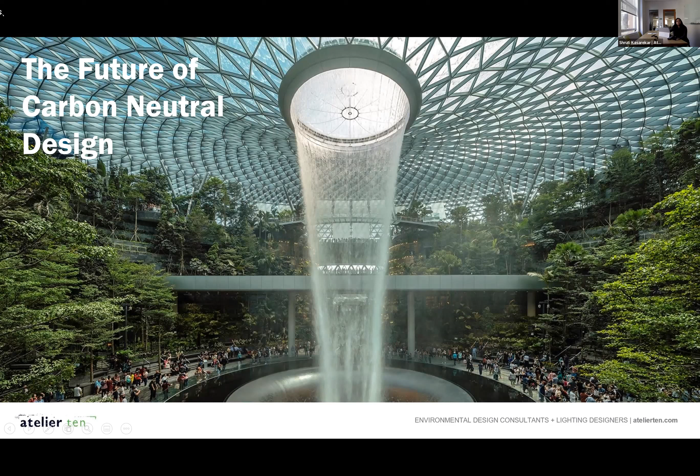Okay, there you go. So a little bit about Atelier Ten. We are a group of environmental designers, that's what we call ourselves, who are focused on delivering sustainability, and the definition of sustainability changes for us for every project. We are a group of people who have various backgrounds, from architecture to urban ecology to material toxicity, mechanical engineering, electrical engineering, lighting design, master planning. So all different angles here come together, and I think we share this passion about making a difference in the built environment at any and every scale, and that's what we are.

Our basic principle around our practice is to have buildings do more, to have the landscape, anything that we build, do more and find meaning into it. We go back to the first principles very regularly. I think that's who we are. So we go back to the basics, try to look at the physics and the science behind it, and try to provide solutions and strategies around that.

We love to work with architects, and a lot of us are architects by training, so we naturally speak that language, and we absolutely value design and love to work in an integrated design process, coming up with solutions that are not just created by us, but design solutions created by an integrated team. One of the things that we have developed over years is that we remain very pragmatic. We are very practical, we understand what it takes to deliver architecture, and we think solutions should be pragmatic for them to become real and for us to learn from them and to move forward. So our practice is very pragmatic.

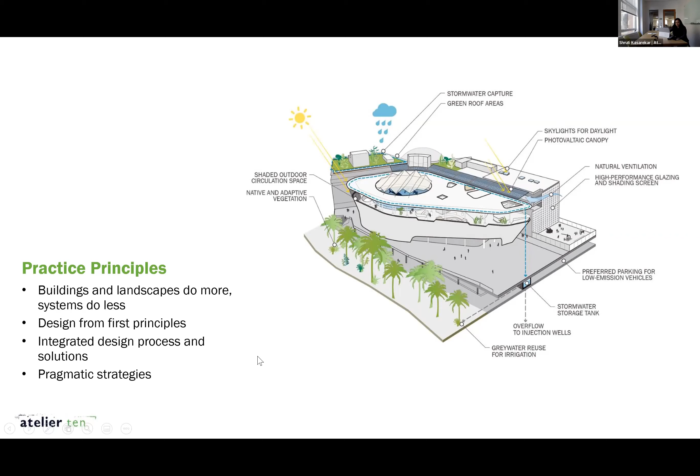Our services have been developed because we find very often on projects that the needs are different, the client is different, and the solution is different. So it isn't one answer for all projects. It is a tailored, unique, custom answer for different projects.

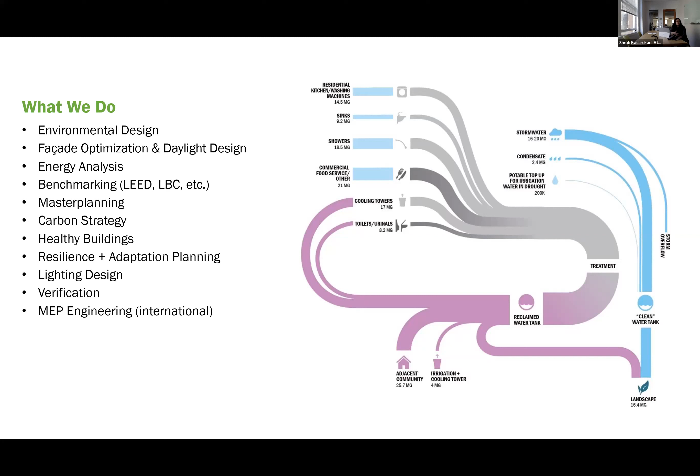So we use, whether it is environmental design or facade optimization, or energy analysis, benchmarking, it depends on what the project needs and criteria is, and we'll bring that expertise and that menu to the table to deliver sustainability. We remain a pretty small firm.

We are around 100 people in the United States, and we have more than 11 offices all around the world. Because we are still quite small in size, we work across all the offices quite regularly. What that lets us do is we have experience in different climate zones for different typologies in different cultures, and we regularly share resources and projects across our offices.

I wanted to give you this context to tell you where we are coming from and why we care about this. What you're going to see through this presentation is that our viewpoint has been developed by working on similar topics and similar questions for years and years, trying to answer the next thing on the next project. So you're going to see that approach through multiple case studies where we've tackled a few issues, and then the next project allows us to push that even further. So we continue that journey.

So why do we care about carbon? Setting the stage here for carbon emissions. Most of you are, I'm pretty sure, very well aware of the recent news on climate change. And honestly, for us as a practice, 2018 was quite a defining moment for us. Until then, we were talking about climate change, talking about carbon emissions as a thing that we all should be doing on our projects, and that's the lens we should have to look at our buildings.

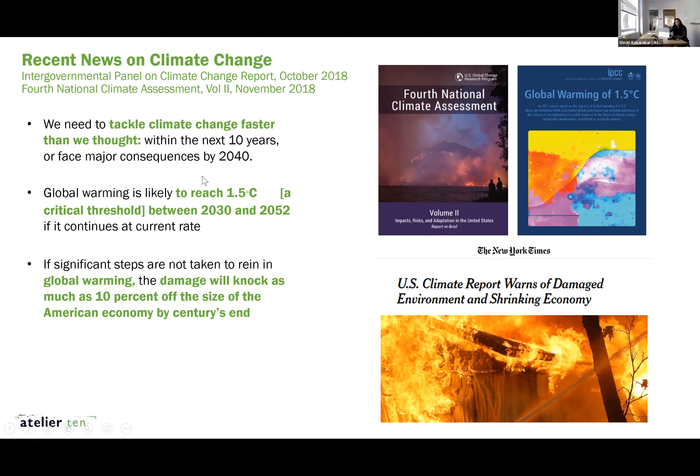With that, we also see that local jurisdictions, codes and standards have also started to evolve based on this information. So in September of 2018, California SB 100 went live. Essentially what it said was that all electricity in California was to be carbon-free by 2045, and majoritarily carbon-free by 2030. Again, this is within the next few years, and this is a huge opportunity for buildings.

And this is not just in California. We see this change all around the world, definitely in all jurisdictions in the United States. Places like New York City are going even a step further by saying that they want to have 100% renewable electricity by 2040, which is even sooner than California.

The other place where we see the codes going is embodied carbon emissions, which is very close to heart and also where architects can do a lot of change. California AB 262 requires that state agencies consider embodied carbon emissions for materials like steel and glass when contracting for state-funded infrastructure projects. It's only a matter of time that this language gets translated into local codes like Cal Green, or even the prerequisites for LEED, which eventually become the code for local jurisdictions.

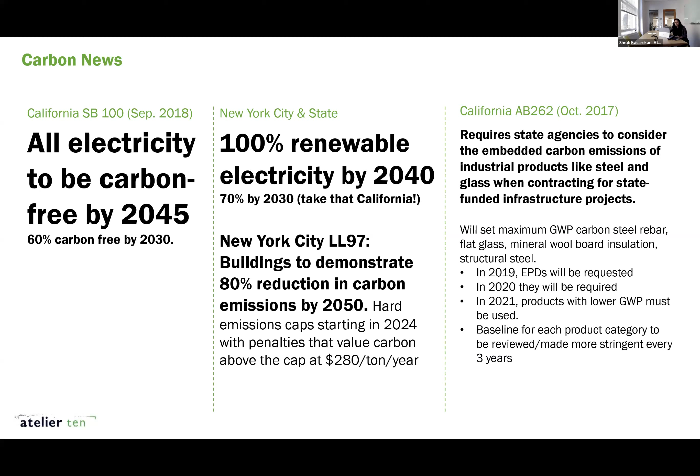So when we think about decarbonization within the context of the built environment, there is so much that we as designers can tackle. We've always talked about energy conservation for the past many years. I think the new information coming to light as a result of some mandates from local utilities and states is that electricity is getting cleaner, which means our energy sources are getting cleaner. We need to take a new look at how to design buildings to take advantage of that.

In addition to that, embodied carbon of materials, as I mentioned, remains a significant topic for designers to influence. There are so many areas and avenues through which designers can influence the carbon emissions of projects. The built industry isn't formally recognizing some of these. That doesn't mean we shouldn't be aware of them and tackling them, but topics like refrigerants, waste created through buildings, water, and transportation are key criteria that will influence the overall carbon emissions of any project.

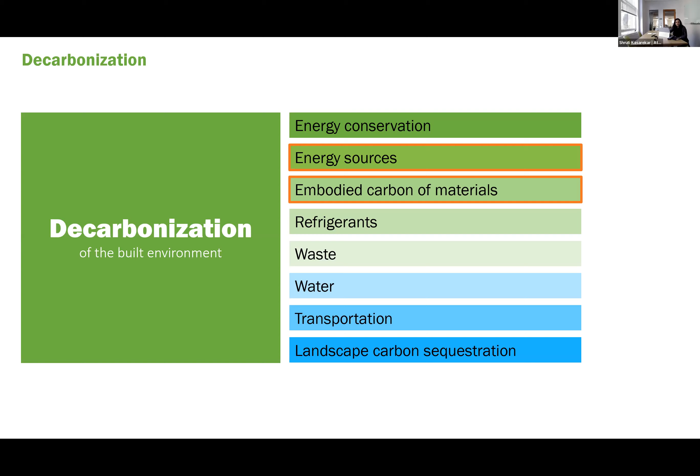In this presentation, I'm going to talk about energy sources and the embodied carbon of materials as two topics to dive into, to tangibly understand what we can do right now to lower the carbon emissions associated with these. My presentation has two sections where I introduce these two topics — embodied carbon emissions and operational carbon emissions — and then a few case studies to illustrate how through design we can achieve these goals.

So I'll go through the embodied carbon emissions section first. Also, I forgot to mention — if you feel a question is going to be an important part of this discussion while we're in it, please feel free to say so in the chat. I'm happy to take questions or discussion while we go through the presentation.

A lot of you may already know what embodied carbon is for buildings, but for those new to this, here's a refresher. For every construction project, there are three cycles. One is the extraction, assembly, and transportation cycle for materials. Then the materials get installed into buildings and the building gets utilized — that's the operations piece. During that time there may be renovations happening — that's the renovation piece. After the useful life, the materials are discarded — that's the disposal piece.

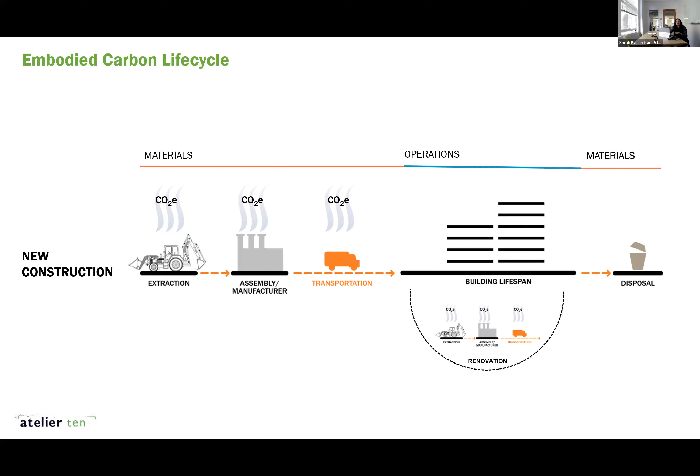So understanding how these life stages of materials come together and how they affect the carbon emissions of the building is what's called the embodied carbon life cycle. So how much does this matter? Is it a big deal? Should we care about it?

Here's a characterization: on the left you see a 60-year time period of carbon emissions. Blue is all operational carbon emissions — the energy utilized in the building — and the warmer color scheme is the embodied carbon emissions. When looking at a 60-year time period for a pretty average building, embodied carbon emissions can be about 20% of your overall carbon emissions. However, if you make that time period shorter — here's the same building for a 20-year time span — suddenly the embodied carbon emissions become a much bigger chunk of the pie.

Now take this information and revisit what we saw in terms of this decade being really important for minimizing carbon emissions to keep the 1.5 degree Celsius temperature rise in control.

Because embodied carbon emissions get locked in right now, you can't do anything about it after a decision about a material is made. You can't change that. It gets locked in for the life of the project. Those emissions mean a lot for right now and for this decade. So from a time of use perspective, embodied carbon emissions are extremely important because those decisions cannot be undone. Operational carbon emissions, on the other hand, are slightly different.

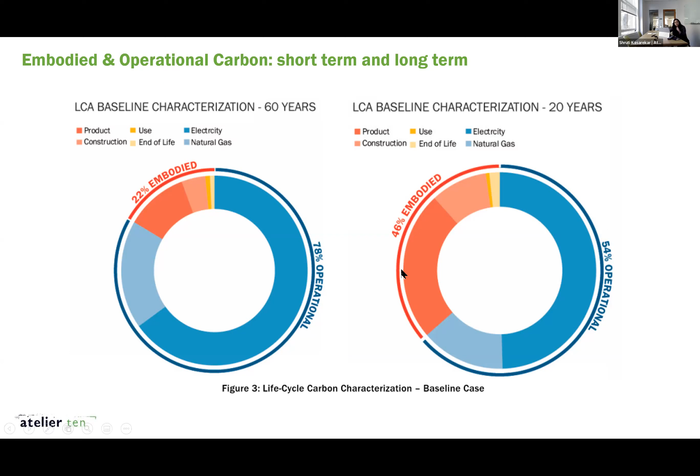A few years ago, and for the entire time that I've been in this industry, we've been trying to tackle embodied carbon of materials, and there hadn't been a standard that we could utilize which would allow us to do an apples-to-apples comparison of projects. That was a huge limitation.

A few years ago in Europe, an important body of work happened, where a few people came together and decided that we need to create standards to measure the carbon emissions associated with these various stages. Here's a process that they came up with, which has now become a standard for evaluating embodied carbon emissions for all projects in the world.

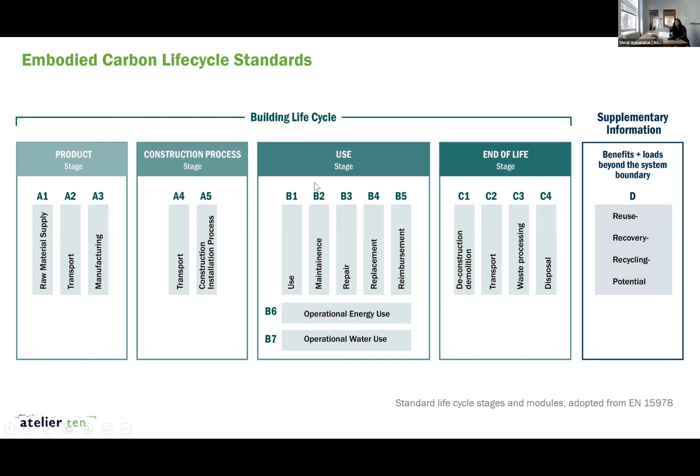So what that standard or process involves is looking at the product stage, the construction process stage, then the use stage, and the end of life stage. All of this together becomes your building life cycle. Now that we have this process, we can utilize it to compare completely different materials, as long as we are representing all the right stages. That was a really useful piece of work.

What that has now translated into is various agencies and organizations taking that and creating a boundary for projects for assessing embodied carbon. So you may have noticed that the current version, LEED version 4 and 4.1, has started to acknowledge embodied carbon emissions.

Just to put things into perspective, here's the LEED scope. When LEED says it cares about embodied carbon emissions, it cares about the structure and the enclosure. Those are the two categories LEED has said it would like projects to evaluate. We think that when we're looking at carbon emissions, we should at least be looking at structure and enclosure, plus the interiors and the systems. That gives us a full picture, which we call the complete building.

And then again, like the decarbonization chart I had earlier, that boundary can be expanded to include site, landscape, and everything that we as designers touch through our project site boundary.

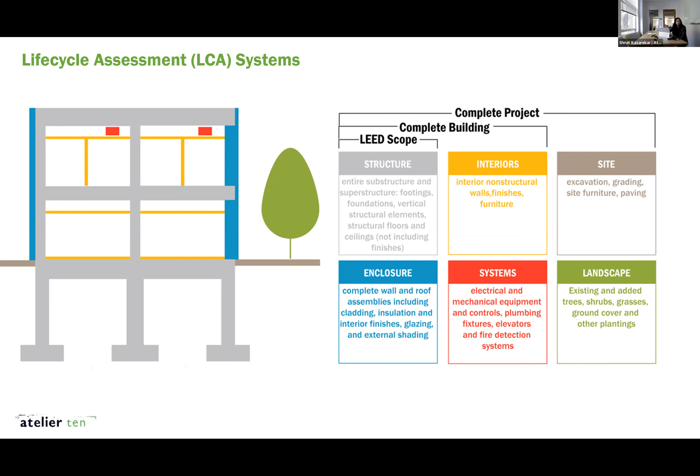So if you care about LEED and want to know how this impacts it, LEED version 4.1 awards up to 3 points for completing an LCA, the process I described earlier, by reducing the embodied carbon emissions of structure and enclosure, which is what LEED cares about, by 10%. Three points is a pretty big deal for projects that have high aspirations.

There are other certifications that have now started acknowledging embodied carbon emissions, one of them being the AIA ILFI Zero Carbon Certification, which requires projects to be net zero energy—that's the operational carbon emissions—and also reduce embodied carbon emissions of the foundation, structure, and enclosure by 10%, and disclose and offset the remainder. So it's a little stricter than LEED, which caps efforts at reducing carbon emissions by 10%. ILFI would like projects to also offset the remainder of the carbon emissions.

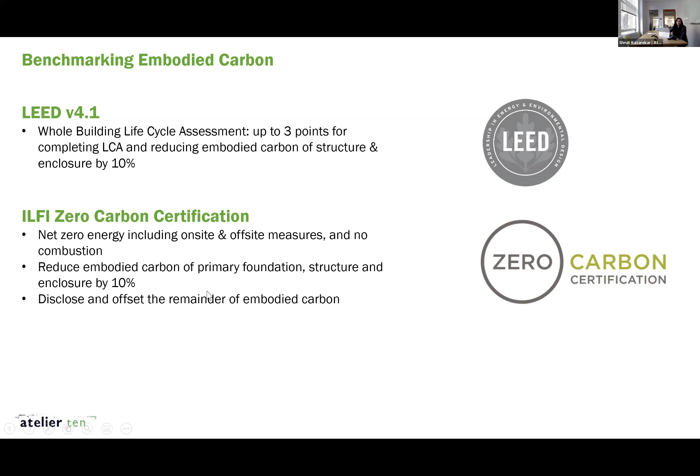So what can you as designers be doing on your projects? Oftentimes the challenge is that in early phases of projects, in concept and schematic design, we don't have a very good understanding of exactly what material quantities we have for the structure and the enclosure. We don't have that level of detail. So if we don't have that level of detail, how can we meaningfully still make progress and make the right decisions on projects? Here's an example of how you can do that.

What can happen in early phases of projects is an apple-to-apple comparison of material types or products within the same group. For example, here is a comparison of different configurations of concrete that can be used for the project, doing a relative comparison of those mixes to see which configuration results in the lowest greenhouse gas emissions.

Similarly, here is a comparison of different types of insulation: light density mineral wool insulation, XPS insulation, a variety of polyiso insulation, heavy density mineral wool, and fiberglass insulation. By comparing just insulation type in terms of their intensities, you can tell which material is better compared to the others, and that can still have a huge influence on how your assemblies are designed.

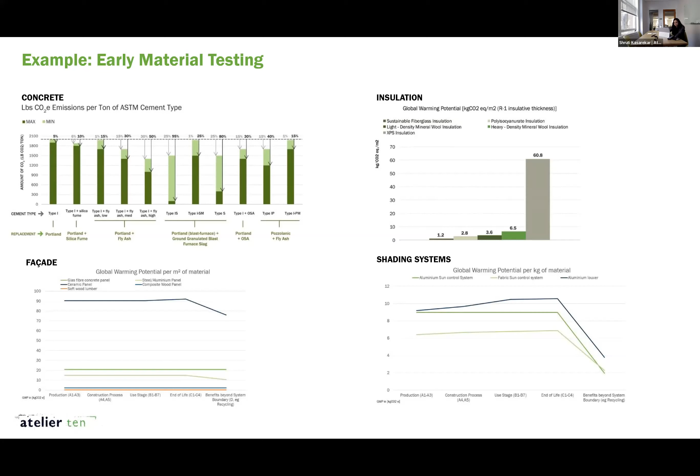Another way to tackle embodied carbon emissions is to look at a material category. We know just by sheer volumes that steel and concrete are always going to have extremely high embodied carbon emissions, so those are great starting points for us to do a deep dive into what we can do about concrete.

As you probably know better than me, concrete is not one mix for the entire project. The mix design changes depending on the application, and the opportunities change also depending on the application. There are many considerations like the strength of the concrete, the curing time, and the appearance of the concrete that determine what mix will ultimately get designed.

Here's a project where we looked at all the mixes in the project that were considered. For each of those mixes, we worked with the structural engineers, the architects, and the concrete supplier to figure out what type of cement replacement was possible for that particular application, considering strength, curing time, and appearance criteria.

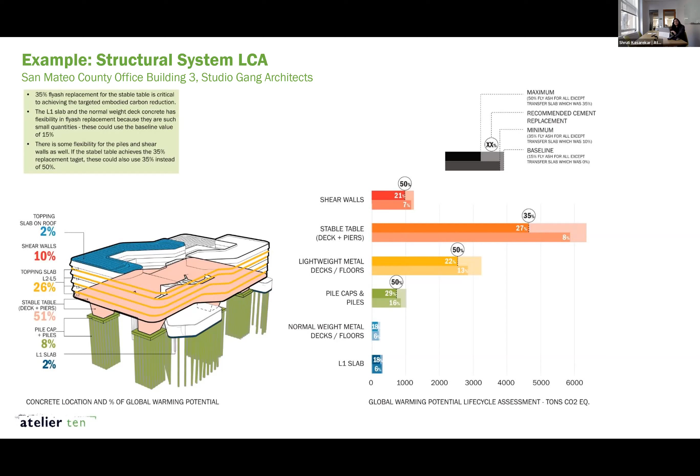Just based on that, you can begin to see that the opportunity for reduction is pretty huge. As an average, we see that within the family of concretes, there is an opportunity to reduce embodied carbon emissions by 30% if the mixes are properly designed with that criteria in mind.

Another one, which again allows us to do a comparison early on, is interiors. Interiors is something that for the longest time was ignored because when you have concrete and steel to deal with, who cares about interior products? Also, they're smaller in volume and there is a variety of them - that was the traditional or old way of thinking.

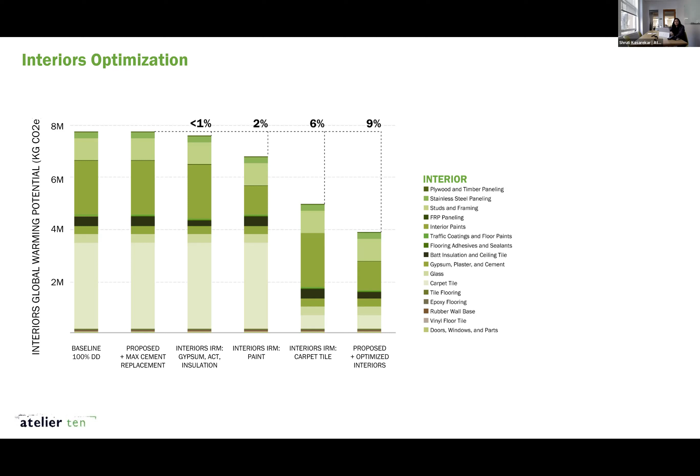So we continue to find that carpet tile and interior paints especially are something to really focus on, because not only are they quite carbon intensive if not properly selected, but they also have pretty significant health impacts.

Here's one more comparison, and this is where we get into figuring out the decisions we are making for carbon emissions related to materials. If they have a function, how can we justify that material in a project? For a project, when we looked at aluminum exterior shading, we wanted exterior shading because it allows us to reduce the cooling load in the building, and therefore the operational carbon emissions. But how can we design that aluminum exterior shading so it can pay back very quickly by reducing the cooling load in the building?

What you see here on the left is a comparison of various types of aluminums, just within the family of aluminums. Depending on where it is sourced and what the manufacturing process is, the carbon emissions or global warming potential associated with aluminum can be extremely different. Once we arrive at the type of aluminum to select on a project, the finesse is how to design that exterior shading with the least amount of material possible, while still providing beneficial shading so it can do its job and we can recover the carbon emissions associated with that material through reduced cooling in the building.

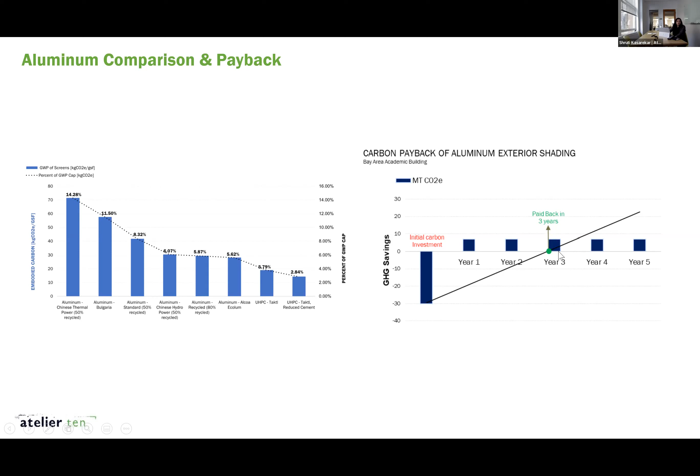No embodied carbon conversation can be complete without existing buildings. We love the opportunities that existing buildings present when it comes to preserving the structure and the enclosure where possible, and still redesigning the buildings to be beautiful and habitable. Here's an example: the Cal State LA Physical Science Building Renovation Project.

Using this project as an example, we looked at how much carbon can be saved by saving buildings and renovating them instead of demolishing them and constructing new buildings in their place. If this building was demoed and reconstructed, this would be the profile of the carbon emissions, both operational and embodied carbon together. By just saving the building enclosure and the building structure, in this particular case, we were able to reduce carbon emissions of this project by 29%—so that one single move reduces carbon emissions by about 30%.

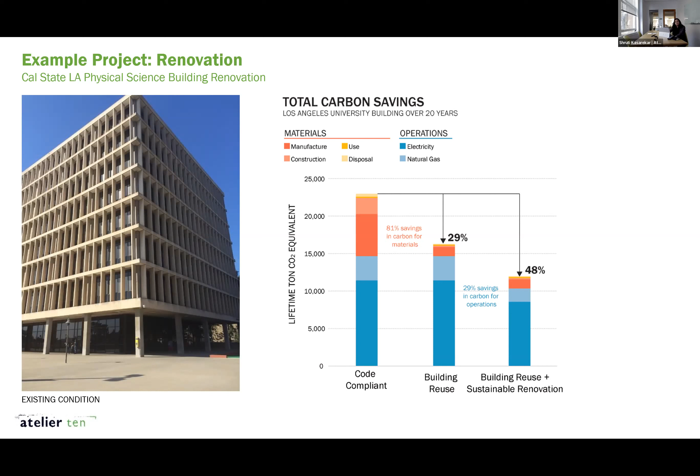The one place I mentioned where we can have a positive difference is landscape. A couple of years ago, we partnered with CMG architects and helped them create a tool called the Pathfinder Tool. This tool is available for everyone to use—you can use this location to access it.

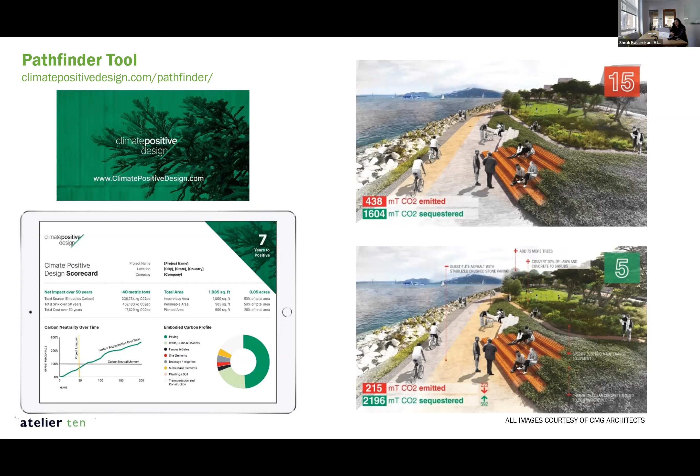Especially for projects with a very big open space or landscape component, this tool allows you to figure out the role of landscape in sequestering carbon. It gives you metrics on the type of landscape that can be beneficial, and allows you to quantify it. Please feel free to use it and experiment with it, and reach out to us if you have any questions or suggestions—we'll be happy to take them.

A couple of years ago, we decided we wanted to really take a look at and reevaluate the way we talk about energy use and greenhouse gas emissions, and the connection between these two. For all these years I have been in the field, we've wanted to talk about carbon emissions, but somehow we kept getting dragged into site energy, energy cost, or in California, source energy—all as a substitute for carbon emissions, while never talking about carbon emissions directly.

For you to understand the difference between these four—site energy, source energy, and others—if this box is a building, site energy would be the energy measured right at the boundary of that building.

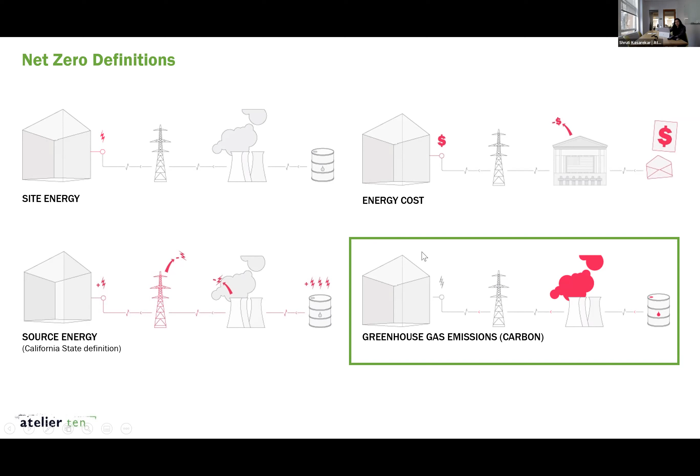Now, source energy was the closest that came to carbon emissions, and that was California's way of getting closer to carbon emissions. But it still made you measure energy at your site and then convert it into a source metric. And then carbon emissions is what we all should be caring about, which is the carbon that is emitted into the atmosphere. So we are very glad now that the industry is talking about carbon emissions. That's what matters, and the rest of it was all proxy. I'm glad that we are now ultimately talking about carbon emissions.

So how and why is this different? Allow me to introduce this concept to you. Here's a typical energy use profile for a building that you may be familiar with. On the left scale is a full day from hour 1 to 24, and on top is January through December. So this is your annual profile.

What you see here, which is very typical for California, is that summers are pretty hot, the rest of the year is pretty warm, and nights are nice and cool. That is reflected in how buildings utilize energy. So red is lots of energy, yellow is medium energy, green is low energy.

Now, if you look at how the rate structures and how the utilities look at cost, it sort of reflects how energy is utilized. So typically, the costs of electricity are high during the summertime. They are low during the shoulder season and early hours, and then they are very low during the nighttime.

But take a look at this profile here, which is carbon emissions. It does not reflect your building's energy use, nor does it reflect the cost of energy. It has its own profile, and that's because the power plants, the way they are operated and which power plants are operated, is not based on how the buildings are using energy. They're based on how the grid works.

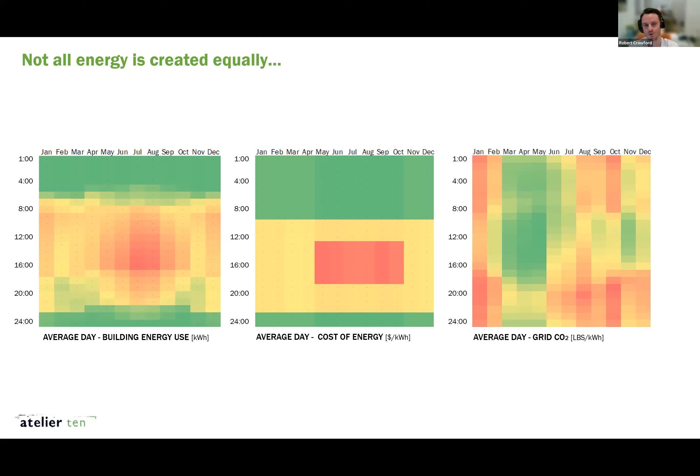Hey Shruti, if you don't mind if I interrupt, if you go back one slide. Yeah, I'm just curious, two questions for the image on the far right. One is, is there some sort of relationship that you see between the downstream usage and the relationship with how the grid fires up? And then two, is that graphic on the right for all of California, or I imagine that would change based upon where you are and what grid resources are available?

Perfect. Yes, so I'll answer your second question first, and then the first question after that. So it changes, and I think that's exactly where I was going, let me just go there one second, sorry. Okay, so yes, it changes depending on your grid region. And the grid regions are not the same as the state boundaries, they're not the same as any boundaries really, they are their own boundaries. They are called the balancing authorities or the ISOs.

So for any project, rather than noting that your project is in LA or in San Francisco, when it comes to operational carbon emissions, what we should be utilizing for our projects is which grid region are we in. So for San Francisco, and for a lot of the LA region too, we are in the CAISO, or Cal ISO as it's also called, region. And so the carbon emissions profile associated with that grid region is what we need to understand to be able to make meaningful decisions downstream on our projects.

The only exception to the grid regions, by the way, is Texas, which the entire state has its own grid region. If you remember last winter, when the entire grid basically went down, the entire state was affected and that was all over the news. That was because the entire state is its own grid region. That's the only exception. The rest of the country is all intermingled grid.

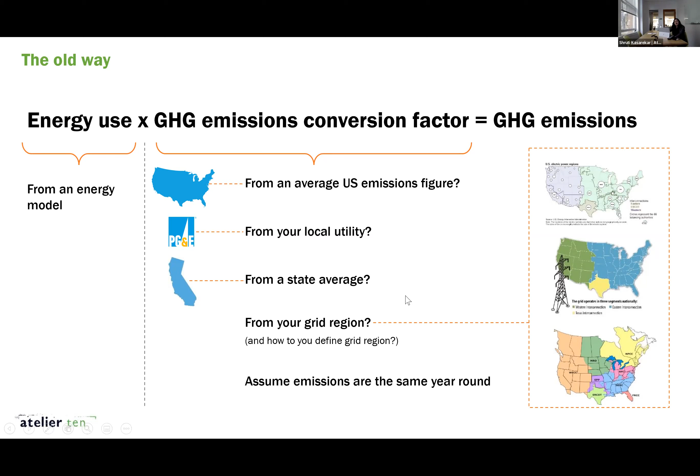And then your second question, which is how do we influence our decisions and our strategies in the buildings to be responding to these, is exactly what I want to talk about through the case studies on how we can do that.

A lot of those go to the first principles of how can we create buildings that consume less energy in the first place, so that we don't really care whether it is green or yellow or red. One reason that's important is because the grid profile is going to continue to change as more renewables get fed into the grid. So we're not just designing buildings for a static profile, we're designing for an ever-changing grid profile. To hedge our bets around something we don't know exactly how it will turn out, the best thing to do is go to first principles and consume as little as you can. We still believe that's an excellent starting point, and we should be challenging that as much as we can.

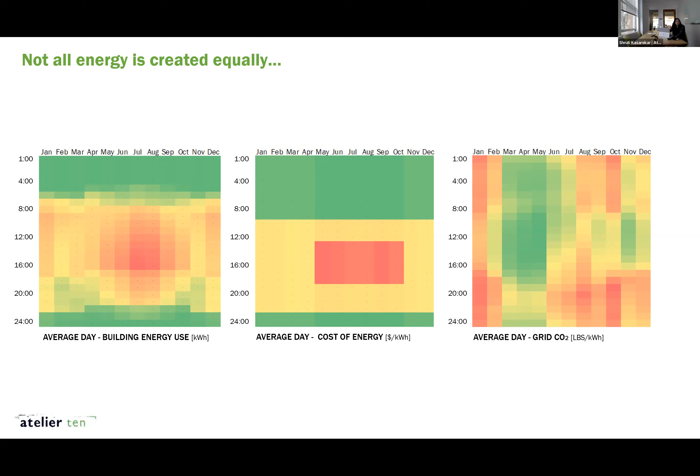So, like we were just discussing, the new way to factor into our conversation is not just how much energy we are using - we should definitely be talking about that, but not just that. It's also when we are using energy and how that relates to the carbon emissions profile. So how much, when, and then looking for the right grid emissions factor through the balancing authority you are in will give you your greenhouse gas emissions.

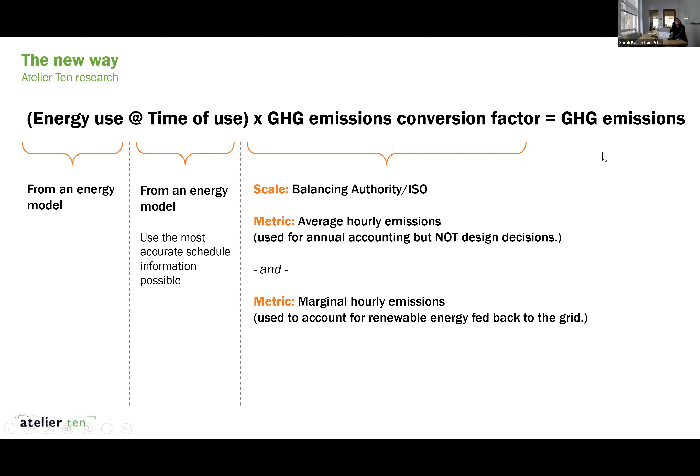If you're interested in more of this, we've written a whole white paper that talks about when and how, and goes into a deeper dive of this. It's called The Future of Carbon Neutral Design. It's free for all and details a full methodology on how this calculation should be done. We'd love to talk about it, so feel free to reach out to us, feel free to reach out to me if you have any questions, and I'll be more than happy to answer them today or at any later date.

So the first step we're seeing in how the built industry is responding to this changing nature of the electric grid is by electrifying buildings. There are several REACH codes now in California that local jurisdictions have adopted that have banned natural gas and are expected to continue banning it for eternity. That means domestic hot water, space heating, food service and cooking, and laundry, which were typically fed by natural gas, are now being converted to electricity, and we need to begin accommodating that electrification into our building design.

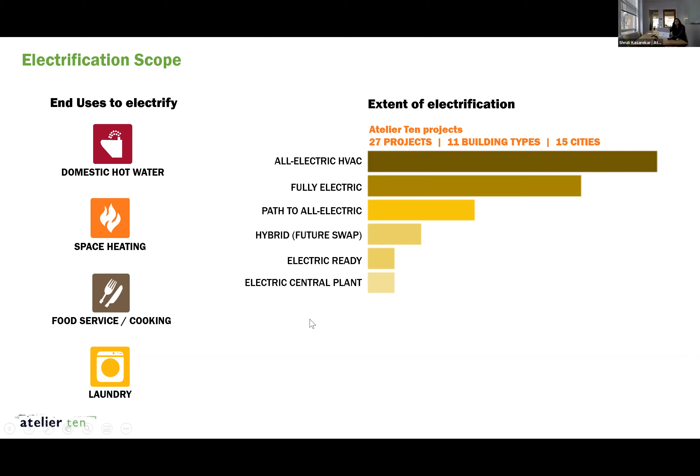So let me now run through some case studies to show how we've either gone to the basic principles to think through some of these critical issues and embed them into design, and then also some of the newer upcoming technologies that talk about flexibility and responding to an ever-changing grid.

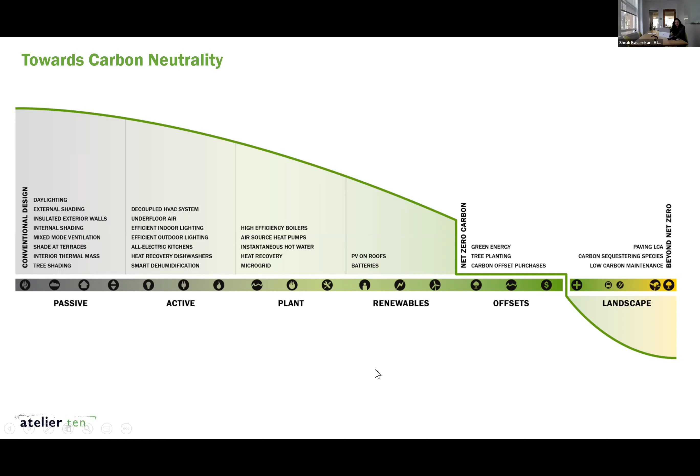So I think this is the slide that answers your question, Robert, which was: we still believe that the basics of looking at passive systems, then going for active systems, then tackling the plant, then renewables, is the right methodology to tackle even buildings that have a changing grid. So that continues to be our methodology.

I think the building skin plays a very interesting and important role in all of this.

Just hold on for one second, it's getting pretty dark here, I'm going to turn on the light. Sorry, my apologies, one second. Okay, sorry about that.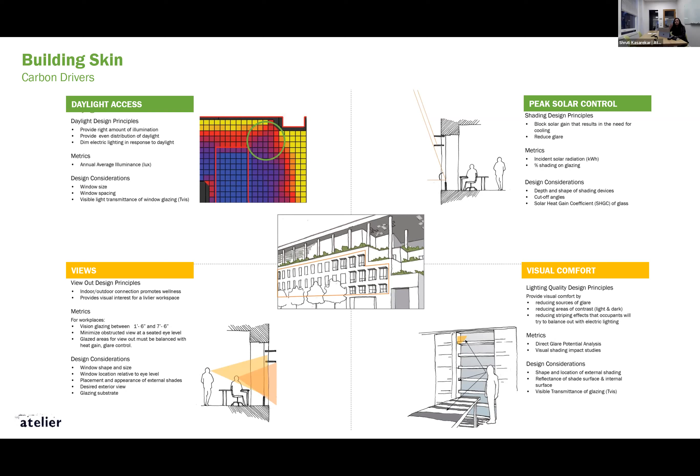The building skin has multiple roles, and we want the carbon story to be integrated into these roles together, so that we are not just designing for carbon emissions, but also designing for the occupants and for the experience that the building skin is supposed to provide. So daylight access, views, visual comfort, and peak solar control put all these things together, along with the carbon drivers I showed you through some comparisons we've done, to form the criteria for designers for the building skin.

So let me show you an example that recently got built and is now operational: the Uber headquarters project in San Francisco.

We were brought onto this project pretty late compared to when we usually get involved. For those who haven't heard about this project, it's an office building by SHoP Architects, located in San Francisco, about 450,000 square feet of office space, split between two buildings: an 11-story building and a 6-story building.

The whole idea, which came from the then Uber CEO, was to essentially have a glass box. That was literally the vision for the project, to have a glass box. That was the client brief.

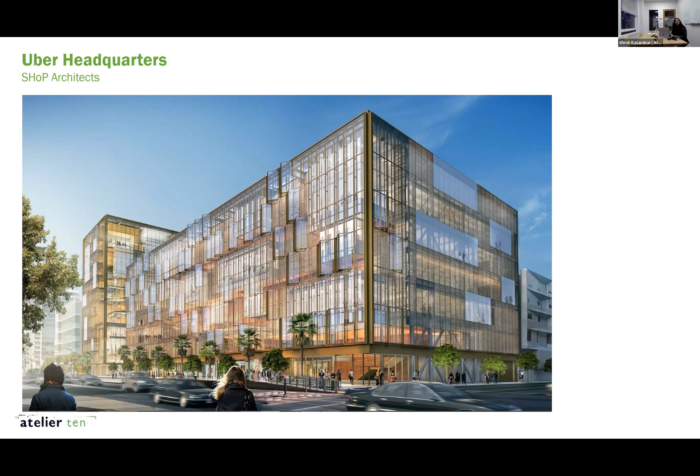When we started working on this with SHoP Architects, both they and us realized pretty quickly that it would be difficult not just to pass the energy code in San Francisco for this building, but also that conditioning a whole glass box is not a great idea. So our environmental and carbon approach for this project was to figure out a strategy that would not just default to: the client asked for a glassy building, so we have to condition the glassy building.

What we came up with, which was actually part of the design itself, is what you see here in red: the entire volume of both buildings combined and connected, meant to be a really transparent, easy to see, easy to access type of space called the Solarium.

We quickly realized that's actually a great opportunity, because this entire space is on the building perimeter, which means it's the space that gets hit by intense solar radiation, and it's a glass box. So we thought this was a great opportunity to figure out if this space's criteria could be developed so it becomes more open, more integrated with the outside than with the inside, and thereby potentially getting rid of conditioning for this space altogether.

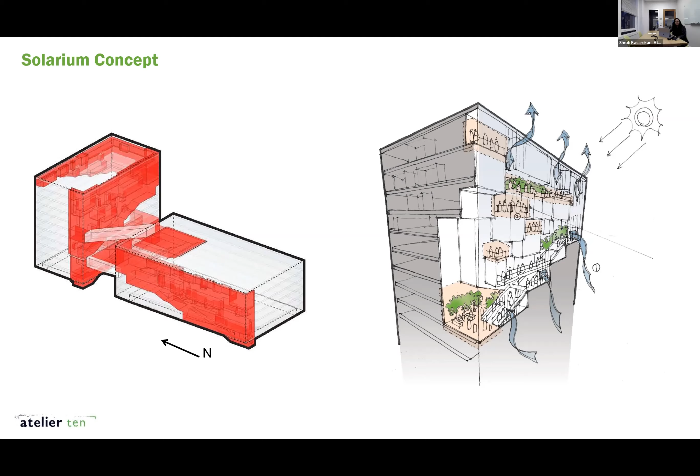Here's a rendering, which, by the way, looks exactly like the actual building. This is that in-between space called the Solarium. Here's the outside, and then the interior, which is the office space, is protected by this in-between Solarium.

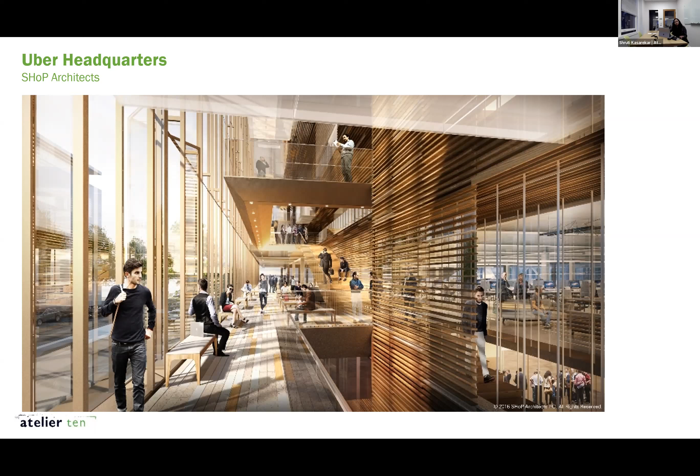So our focus quickly shifted to how do we design this space to become this in-between space where the human experience can be controlled without requiring conditioning. That required us to do a deep dive into thermal comfort and how humans would experience the space.

It came down to a few criteria related to environmental aspects: air temperature, mean radiant temperature, air velocity, and humidity. So what we did was take that space and run analysis to understand what happened.

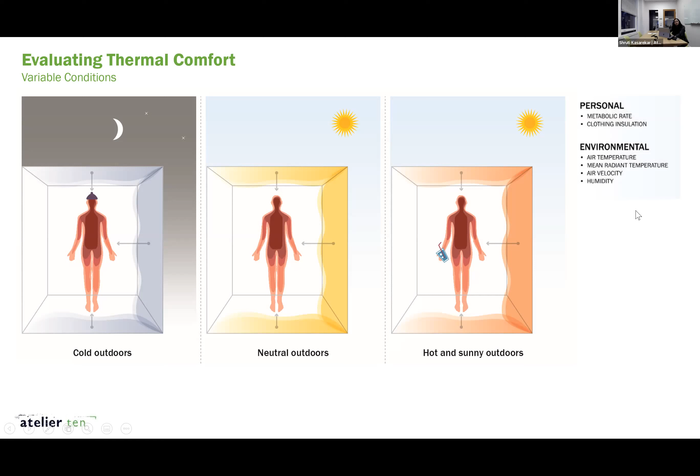We looked at what happened if we treated this entire space as a traditional closed-off box, versus what happened if we added operable windows and shading in specific areas designed in a specific way, and what happened if we integrated some very minimal but intentional cooling that allows us to manipulate the environmental factors associated with thermal comfort, allowing us to not condition this entire space.

So what we came up with is a combination of operable windows and shading criteria for this space that allowed the air to move in a certain direction, prioritizing the opening of the facade in a particular sequence, responding to external conditions.

The fundamental concept of this space became that it is an in-between space that does not have the thermal expectation of an indoor space. So defining that criteria—that it is not an indoor conditioned space, it is an in-between space—was key.

How do we program this space for it to succeed as an in-between space? And how do we create the thermal expectations for the occupants so that they do not expect interior conditions in this space? Through the combination of these strategies, we were able to design this entire continuous space as an unconditioned space.

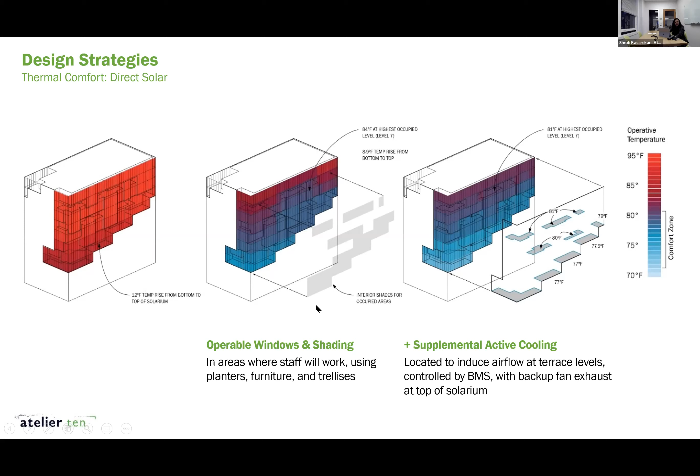Here's a comparison of the overall energy used to give you a sense of how impactful that was. If the project had conditioned the glass box as-is, this would have been the extent of the conditioning energy. Once we remove that conditioning element altogether, the savings is about 65% for the Solarium.

So the strategy here was not to tag on a lot of intelligence into the building just to condition the space more effectively. We went back to the drawing board with a more fundamental concept: how can we just get rid of conditioning in the first place, and come up with a program and a design that allows us to do so.

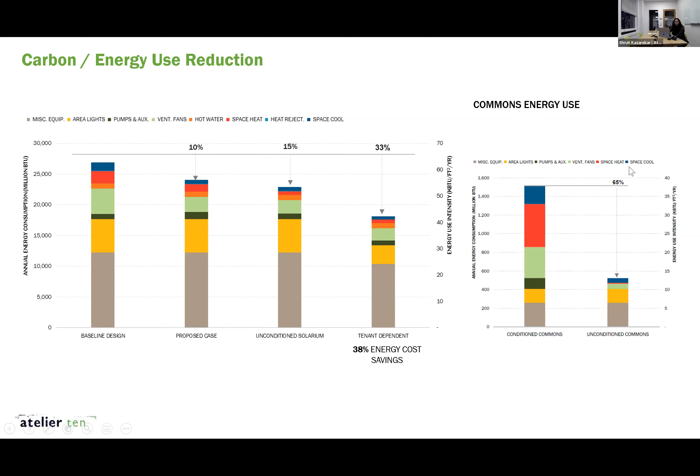The next example—and if this wasn't clear through the previous case study, I just want to make this point—this case study talks about how to effectively go back to basics and design the facade to enable passive strategies, which then avoid emitting carbon emissions in the first place.

The second example is currently in construction in San Diego. It's called Horton Plaza, and we've been working with Rios on this. This is a project about 700,000 square feet in San Diego—an existing shopping mall being converted into an office space.

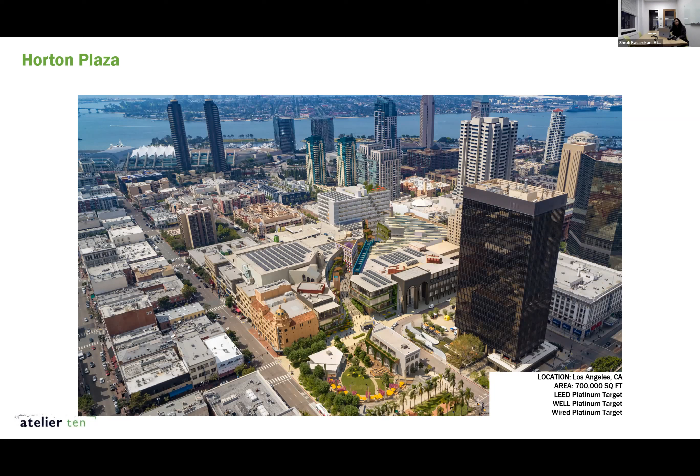It has pretty high aspirations in terms of LEED, WELL, and also a new benchmarking system, in case you haven't heard of it, called the WiredScore Platinum Rating, or Wired System.

This project is in contrast to some of the projects you may have worked on—it's a developer-led project, so the criteria for the facade design and the role of the facade was quite different. Here, first cost was an extremely important criteria for the project. We knew that the entire enclosure design, and its effectiveness at controlling carbon emissions and creating the experience we want, was going to be highly dependent on that first cost.

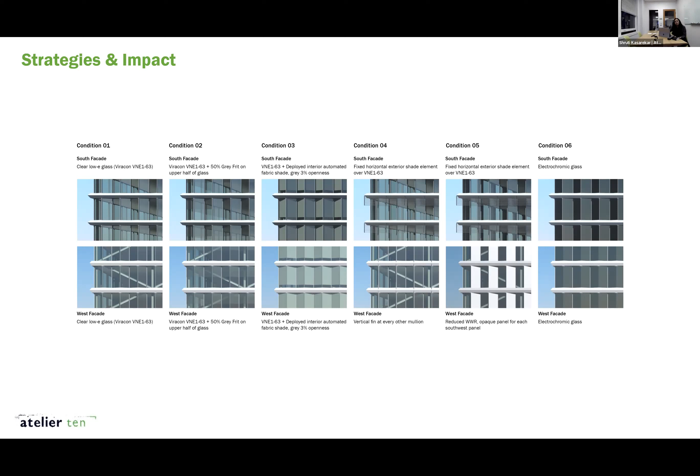So what we did in the beginning was look at both the west facade, shown as the lower row, and the south facade, the upper row. We looked at the combination of exterior shading and glazing specification together to identify what kind of facade options were possible within the available cost model. Here were some of the options that were discussed.

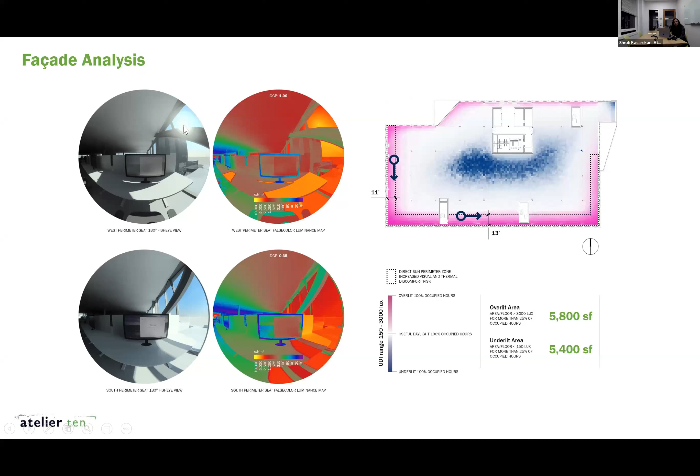Here's another example for west, showing when the blinds are down. I'll go back and forth between these quickly. Here's the ball of the sun. Here it shows the floor plate is quite beautifully lit, mostly white with a little pink. This is a well daylit space, but this is what the occupants are actually going to experience, and then they draw the blinds down to get a good environment, and it results in basically no daylight into the space.

So I think what this illustrates is combining occupant experience into facade design to ultimately inform the carbon emissions, as well as the success of the experience for the space.

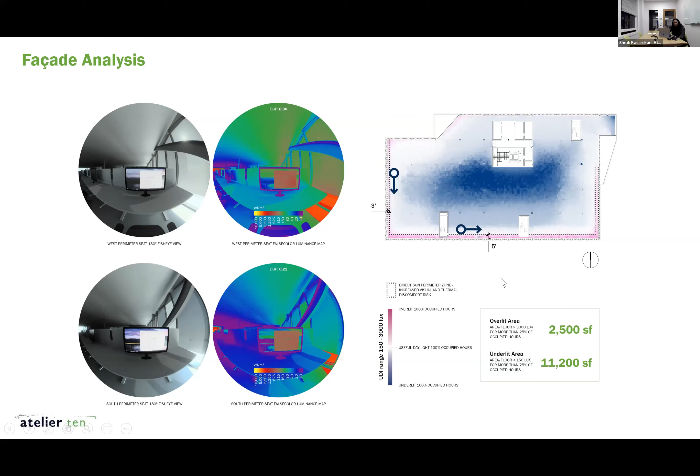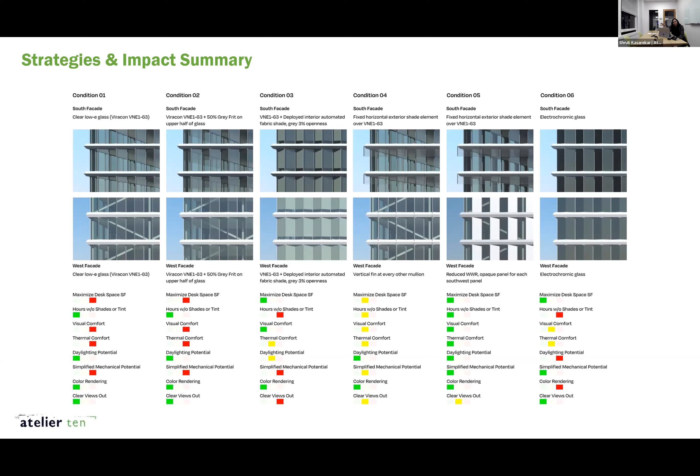So it's a complex set of criteria. It's not just carbon emissions—it's a complex set of criteria, but it gets us to the ultimate goal of being able to both deliver on experience as well as carbon emissions.

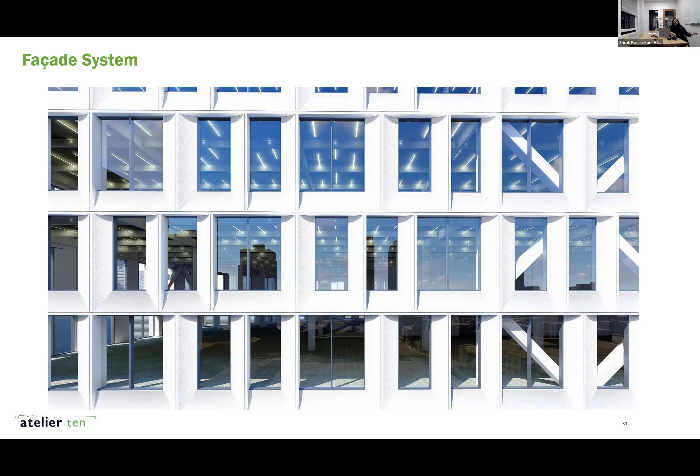And here's the beautiful facade system that was developed as a result. Something to note: the window-to-wall ratio for this facade system is, I don't think, more than 50%. So we worked on that aspect quite a bit. Going back to those first principles, that was one of the criteria in our mind—as a developer project, we want to prioritize glass, but we want to prioritize glass where it matters, and the rest as opaque as possible. We were able to deliver this within the cost budget, serving both the experience criteria and the carbon emissions criteria.

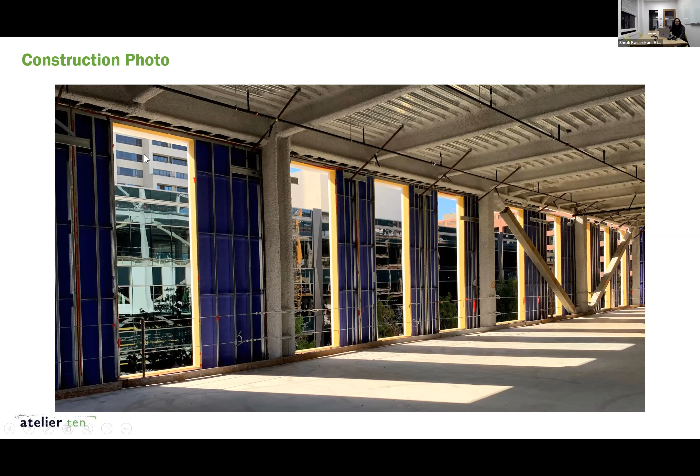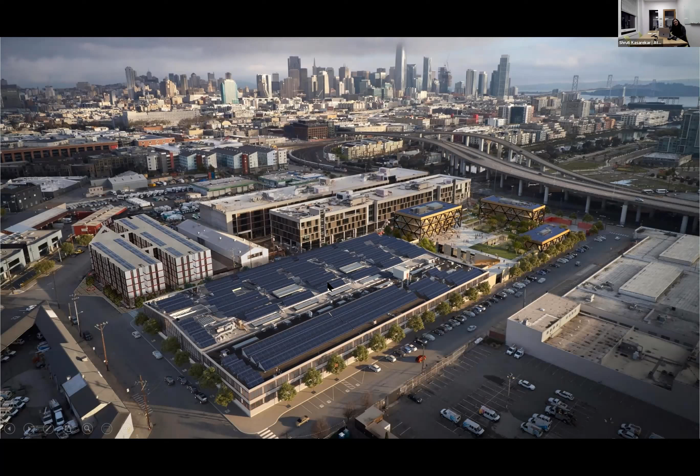We were brought onto this project really early on. We thought, net zero building, totally can do it, no problem, we have this down, we got it. This is also a mass timber project, so it allows us to also tackle embodied carbon emissions. We went back to the drawing board with our first principles: how can we first condition this building using first principles?

The project consists of two building masses and a podium which has a few openings strategically placed to facilitate natural ventilation underneath it. There are a lot of functions underneath this podium as well. We designed for interior and exterior shading to deliver on the same things we're talking about - the experience piece, solar control, carbon emissions, passive cooling, going back to the basics, useful daylight into the space, all the good stuff.

Then we realized that this is California College of the Arts - they have a huge process load that is electric furnaces. They do all sorts of cool glass blowing, cool art things there, and that is the need of the program. So although we can fantastically design a net zero energy building, what are we going to do with the process load? We can't really make any changes there. They also had a very specific selection of these furnaces that we really couldn't change much.

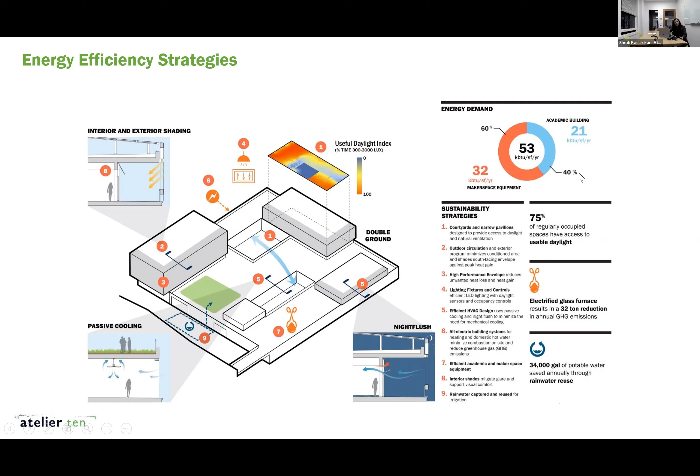That's where we had to get creative about how we are going to actually tackle carbon emissions for this profile. For an academic building, if this project did not have the makerspace, its energy use intensity would be 21. Just the makerspace activities and processes have an energy intensity of 32. You can see the distribution here - like 60% of that energy use is the makerspace. After we made this building really efficient and got everything down, the rest of the building energy use is the academic building, but we still have a massive chunk to deal with.

So that's where we came up with this strategy: we can cover not just our project, but also the adjacent building with PVs. But even that is not going to be sufficient PV on the roof for us to be able to tackle carbon emissions. This is not very new for urban projects - the sites are restricted, the roof area is limited, the roof is also occupied by a bunch of things. You cannot put a lot of PV on it, and that PV is not going to be sufficient for you to get to net zero energy, let alone net zero carbon emissions or carbon neutrality.

So what we did for this project, also thanks to one of the donors who was extremely interested in this topic and wanted us to really tackle it, was we looked at the PV production on our site. We had already tackled the carbon emissions with good design, passive design, good active systems - that was taken care of. Then we had limited PV resources onto the building that were just not enough to get to carbon neutrality. We then added two strategies that have now become quite fundamental to design of buildings in California, which is energy storage.

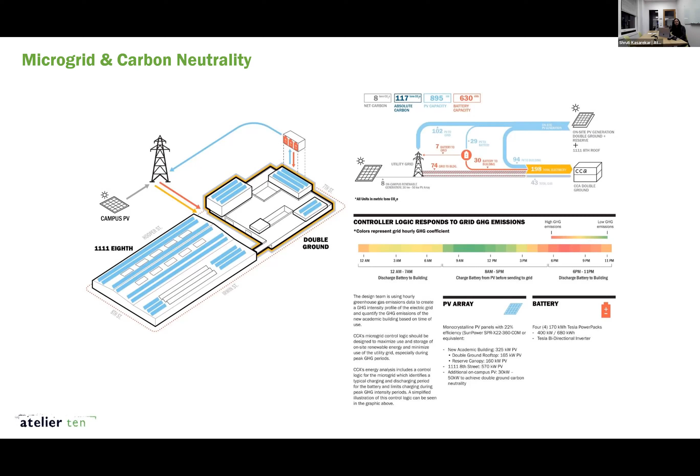So what we found on this particular project is that it was extremely essential for us to tackle the loads on the building, because we have this finite resource of PV. We had to really work on getting the building extremely efficient, deal with the loads as passively as possible, have good daylighting, good massing on the building, and then wisely utilize the PV panels using a combination of batteries and the grid controller logic. So together, all of that allows us to get to carbon neutrality for this project.

One of the other things I wanted to plant a seed here is that we see coming, and expect products like these will become available not very far in the future, is renewable hydrogen. It gets to that same question we've been talking about in this presentation: what are the technologies out there that are going to give us the flexibility we want for a changing grid?

The renewable hydrogen concept is, because you have only so much PV that you can fit on your site, you can utilize that PV to essentially split water into oxygen and hydrogen. And that hydrogen then can be a stored fuel that powers a fuel cell that can be deployed at any point in time for your building.

So we've seen a lot of startups and technologies out there packaging these steps together so that there is a deployable plug and play type of hydrogen system that can be added to your PVs, allowing you to flexibly control carbon emissions of your buildings. But that technology is definitely not mainstream yet — just wanted to share what we're seeing as upcoming technology.

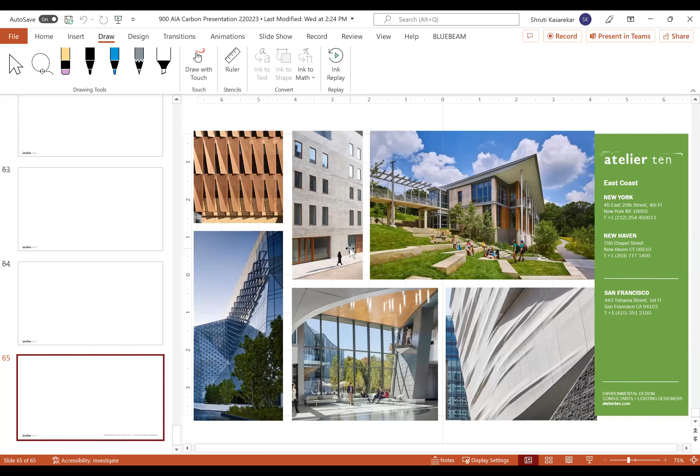No, I mean, there are... I don't know what happened, my camera went away. Oh, no problem. And we've got more and more questions coming, so sorry, I'm hogging. Oh, no worries about that. I think that's because... I'm just going to move to my desk, my battery is dying, but I'll continue to talk. Oh, that's no problem.

Essentially, no, we don't know, and it changes. There are timber structures in the world that are centuries old, so clearly it can be done now. Whether that can be done in high rises, whether that can be done in laminated timber, whether that can be done in modern surfaces, I do not know the answer to that, and I don't think I've actually looked into it. So I don't have a clear answer for that.

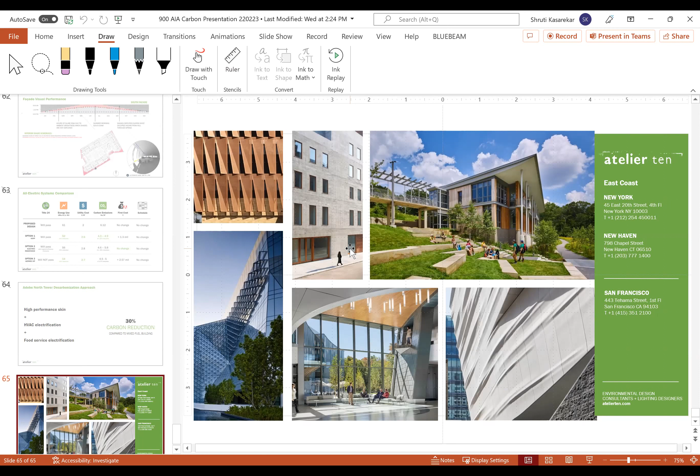If it is a space like it was for Uber, where there is no sort of owner of the space, and we were trying to do something very different, then that level of automation makes sense. If it's an office space like I'm sitting in right now, it's great to have an operable window right next to me. I think it is way more effective. I would be very unhappy if it was automated and I had no control over it.

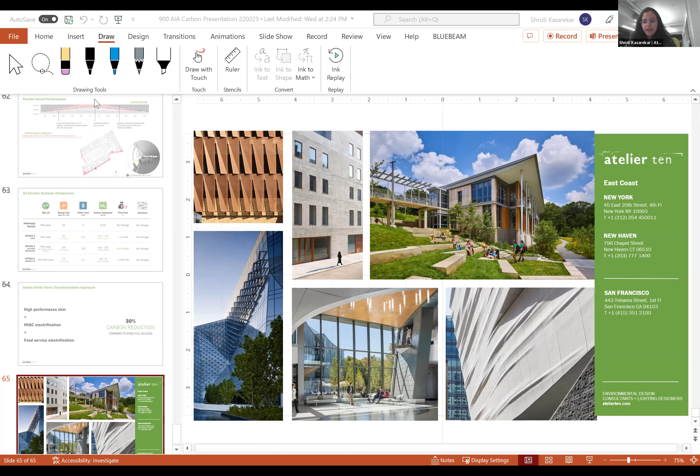And honestly, I think it's gonna happen. The embodied carbon world barely existed five years ago in terms of how you're actually utilizing it on projects, and it has made so much progress in the last five years. I think it is just getting started. There's so much awareness around it right now.

I'm not just talking from a 'the world is going to make it' perspective, but also the material manufacturers are under pressure like no other time to deliver on these criteria—not just because clients are asking, but because ESG criteria in general have taken so much prominence in the corporate world. It's becoming a boardroom conversation for material manufacturers, which used to be more of a nice-to-have. So I think that is changing like never before, and I think regulation will come—or so is my hopeful mind saying.